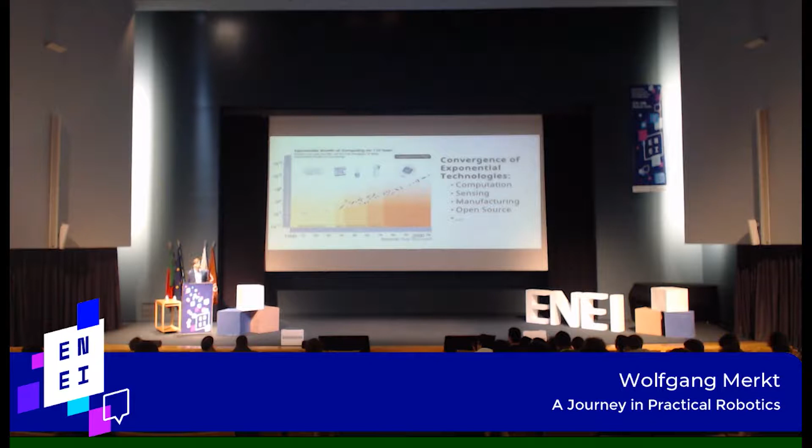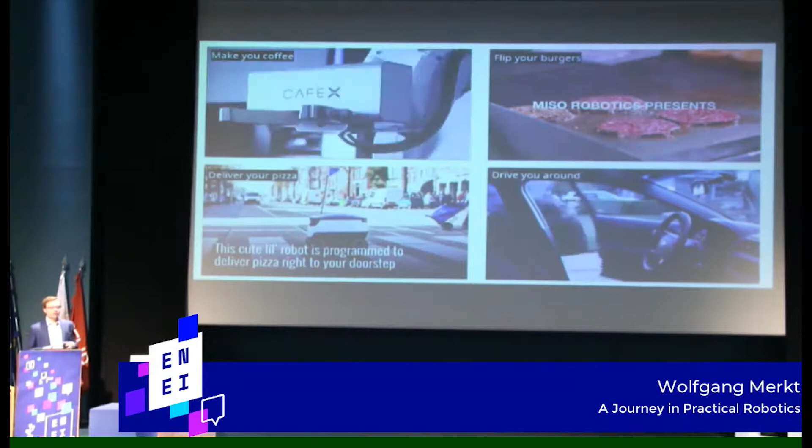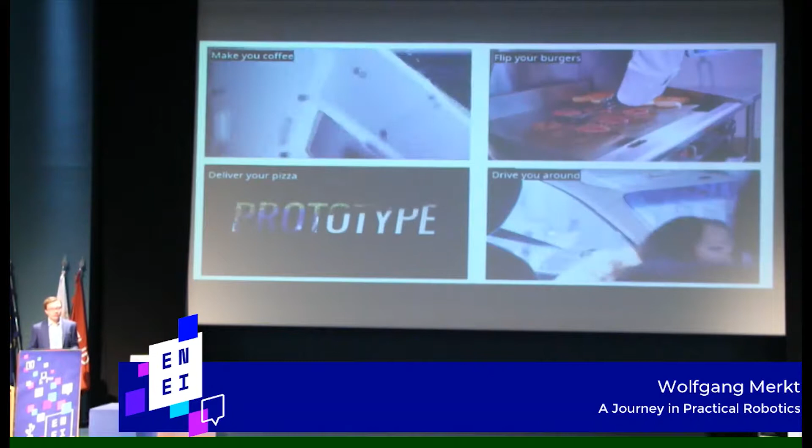What we may not know is that robotics has been an increasing part of our life for the last few years. It has been breaking into our lives in the background, fulfilling our orders with over 100,000 robots now shipping and preparing your orders at Amazon. It has been mining all the ore that goes into the Coca-Cola and Red Bull cans you may be drinking, and it's at the backbone of many advances driving the comfort of society today. But now we're at a time where robotics is breaking into daily life, touching us through media coverage and through what you may see coming over the next few years, preparing your coffee, delivering your pizza, flipping burgers, and being more present in our lives.

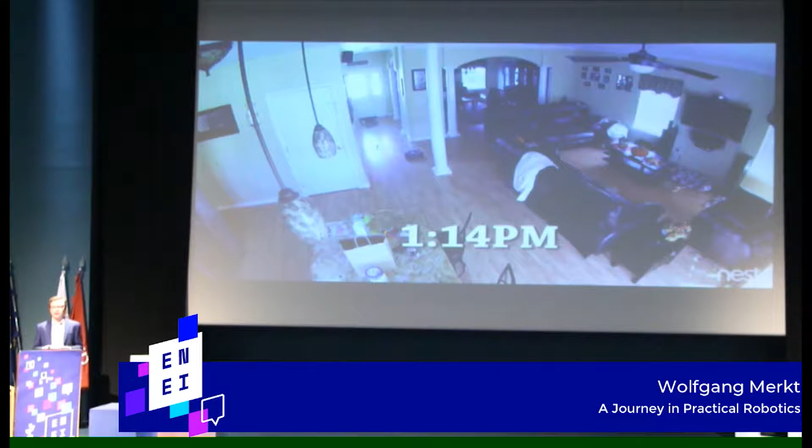However, moving robots into our daily lives and delivering consumer products is incredibly hard. Unintended stuff just happens, because you can't always encode all the knowledge, all the corner cases, everything you may want to target, even for very simple products like a robotic cleaner. Perception may still be something that can't be fully thought through at the beginning, and in this time of robots entering our lives, we may get into a period where things happen that aren't quite as intended.

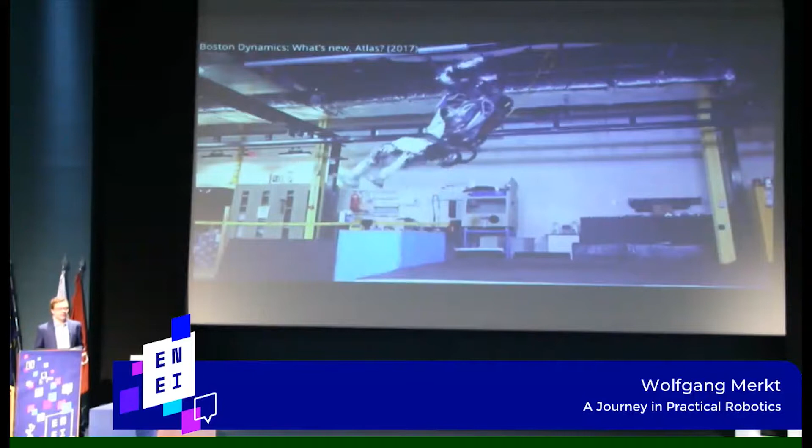On the other hand, things you may have seen in recent years show research robotics making huge strides and incredible performances that are hard to believe. This robot, you've probably seen it, is 1.5 meters tall, close to 100 kilograms, and can move as dynamically or even more dynamically than a human. But what roboticists who actually work in the field are more familiar with is something like this, where it's very common for robots to fail and fall. It may be fairly frustrating if you're working in the field, but that's more what we're used to. So the big question is: what is really the implication of practical robotics, and what's holding us back from achieving more?

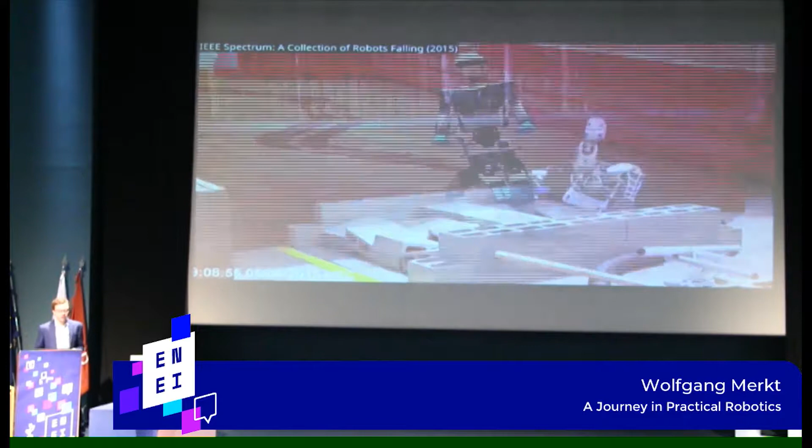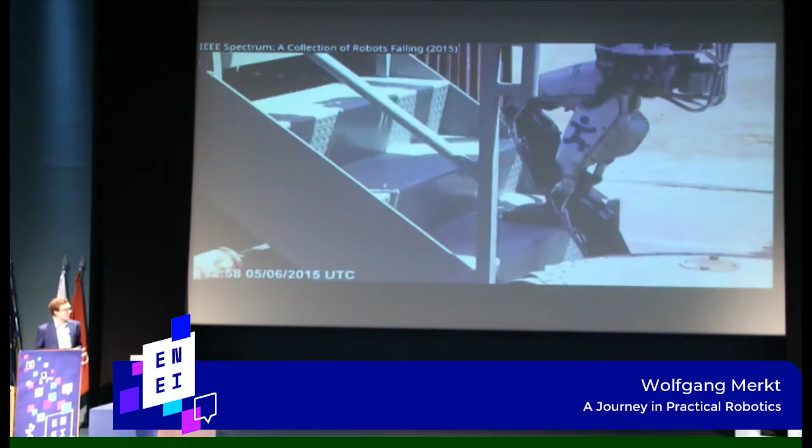To be honest, the category of these failures is pretty much twofold. Half of what you see here is because people made mistakes, and only a little bit is because the robots couldn't quite do it.

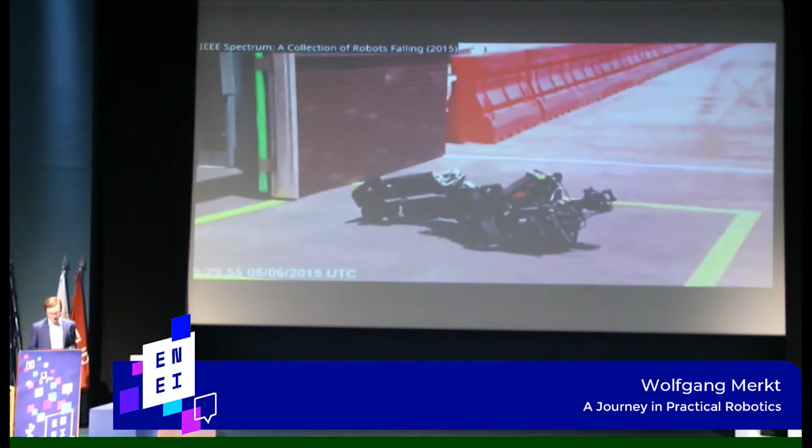All right, enough falling robots. So what I'm going to focus on today is three things. First, why is robotics actually hard, and why don't we see more robots near us or caring for us sooner? That focuses on the challenges we face and what we're doing in research. Second, why do we even want to talk about humanoids? What is so inspiring and really drives us to work on it, and what do you have to consider when you want to build robots that go into space and work there? Then, how both of these first parts fuel some of the research we've been doing. I'll show you examples and what that could mean for the future of industrial automation, especially here in Europe, as robots become more pervasive in more walks of our life.

As a little backdrop, I'm probably only slightly older than most of you here, but my journey started very early in robotics. I've been fascinated by making things move and seeing how things move. When I was 14, I decided to partner up with the largest manufacturer of industrial robots and build something like an autonomous kitchen which does the food for you.

Literally send it a text message. This was before smartphones were around, and it gives you a call back once your food is ready or once you go home.

After that, I decided to study engineering. So I'm not quite a computer scientist by trade. I did mechanical engineering and management and did a lot of startups in between, then went for different stations and internships in industrial and service robotics to do a thesis in machine learning for transferring captured motions to very different morphologies.

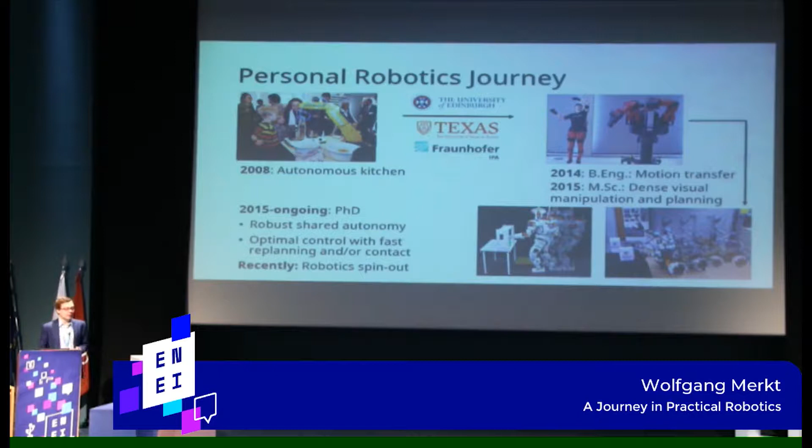From then on, I went to Silicon Valley, came back, did a master's, and currently I'm a PhD student. And since very recently, we're also working, based on what you'll be seeing today, on a startup.

The next step is really, so why is robotics really that hard to translate if you want to execute a fairly simple task in a fairly simple environment in our daily environment? And what we can achieve in simulation is very impressive.

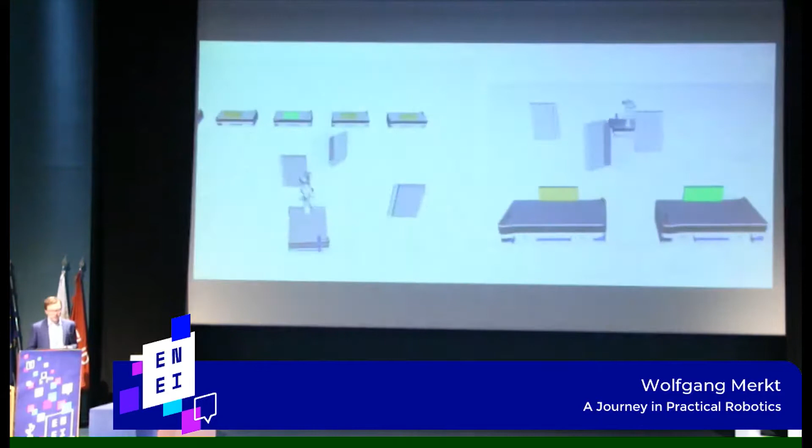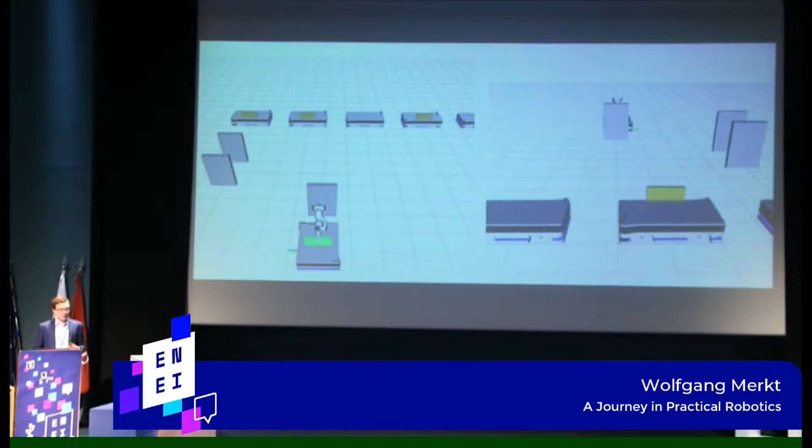So you have a lot of moving obstacles, you have robots in move, and you have to pick objects while everything in the scene is moving. And then with a lot of engineering and a lot of effort and a lot of people, you can translate that into impressive lab demonstrations that work on real sensing, that take input from the environment.

On the left top side, the scene is fairly complicated for the robot because it has very limited ability to move, and it still has to be able to maneuver through this without colliding. The challenge here is to really figure out how to do this really fast.

That is a very new way we demonstrated how you could do that in 1 millisecond, which is kind of like a 1 or 2 order of magnitude step up from what you usually do.

The second on the right-hand side was about how do you, through very remote, so you essentially sit in front of a laptop a couple buildings away, control a robot in a different environment? That's what you would do in a disaster scenario where you're very far from the robot.

And then we have a lot of work recently on a humanoid that I'm going to show you later. Similarly, we can adapt to environments, and we can work really fast.

So what you can see here on the left-hand side is a way to do tracking of objects so that the robot can figure out how it needs to change. It's not all fixed as you may have it in an industrial environment.

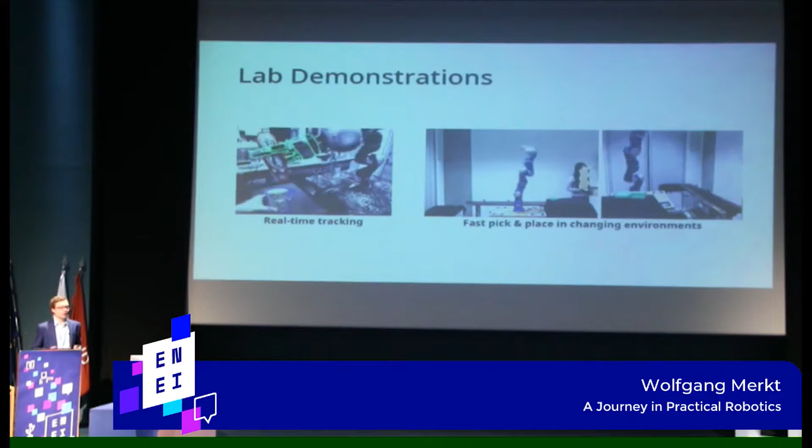On the right-hand side, things are moving again, which is very challenging in the field of robotics where we prefer things to be fairly static.

So I've just mentioned a few of the challenges, but there's actually loads if you want to move from what we see in labs to having it in the real world.

A few of the key things we'll show through this presentation are especially perception, and how you represent what you can perceive with sensors so that the algorithms you build on top can actually make sense of it. The key trade-off here is quality versus speed, and most of the sensors you can get, even when they're really expensive, are actually not that great or are just really, really slow. And that is kind of what's holding us back.

One of these examples is if you have a humanoid and you have a perfect knowledge of how things are going on in simulation and you want to run it on the robot, it may not work. That's due to a multitude of issues.

But a very visual one is you tell it to go somewhere, the thing in gold, and then it ends up somewhere entirely different, just because of how it needs to keep balance, not fall over, or how there's a lot of issues that accumulate.

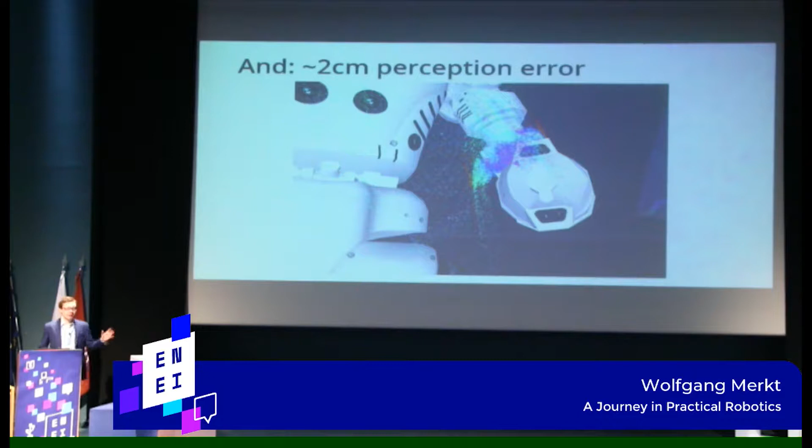The other issue is that even when the robot goes where you tell it to go, it may actually be different from where you intend it to be, because the sensing you get can have quite a large discrepancy from where it should be in the real world. So if you try to look at your hand and you're 2 centimeters off, trying to really get that bottle on the table, you may not quite get it if you're just slightly off.

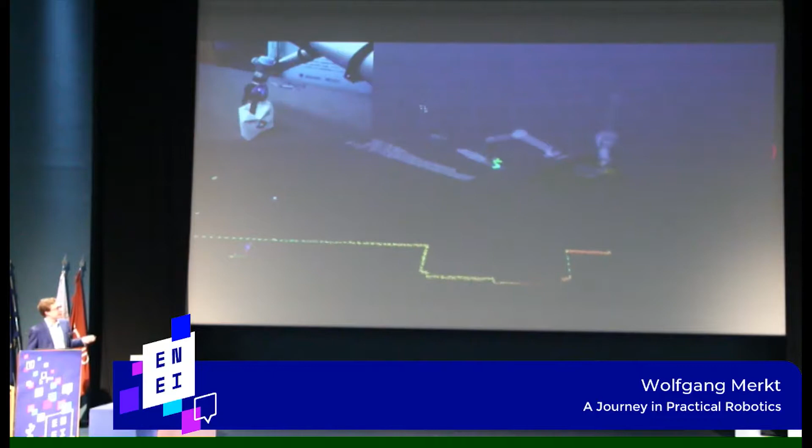What all of that translates to is this example, which is all what the operator sees - this is the user interface. You get all the sensing data streamed in, live sensing from a stereo camera, and you can see the high quality LiDAR that gives you a feeling of where you are in the building. And you're trying to pick up this box, and you just smash it, I'd say.

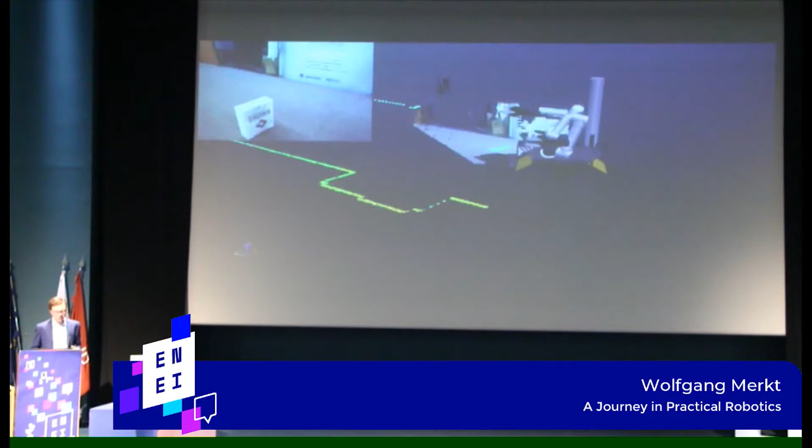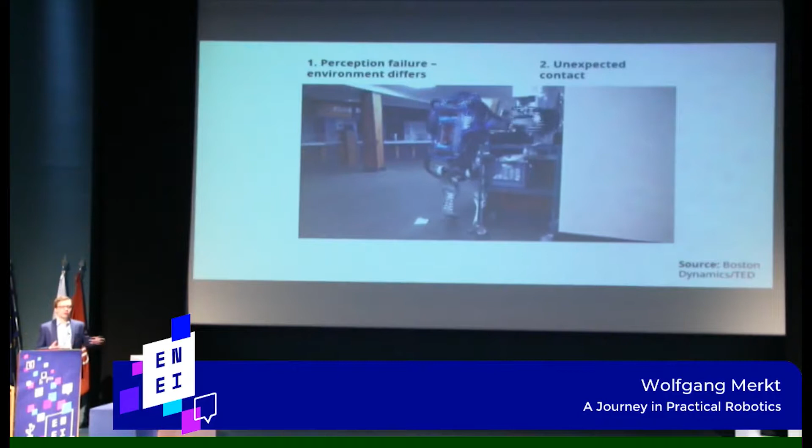And it's not just in our labs where you can see it - you can literally see it all around. If you first start with a simple perception failure, things are not quite where they seem to be. You get an unexpected contact, and yet another unexpected contact, and another, until you finally fail. The challenge for robots is that as soon as you interact and need to make contact - either walking or holding onto something - the whole dynamics of the system, the physics, change, and it's very hard for a robot to figure out what to do. So it's not quite as reliable as we may want it to be.

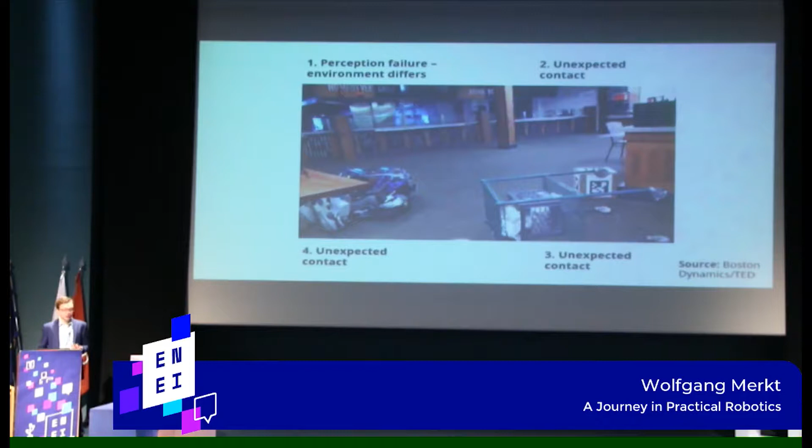If you want to go to space, this is the kind of requirement that space agencies - NASA, ESA, whoever you talk to - will put on you. You essentially need to get to reliability where you get 1 minute downtime in 500 days. You don't want your oxygen system to ever fail, but you don't want your robots to fail either. So there's a lot of certification. You can't use new and fancy algorithms, you can't pick up a library online, and you can't just use the latest computing equipment - everything has to be certified. You likely have to have CPUs that are about 10 to 15 years out of age, and every single library has to be certified, which can take a lot of time.

Let's actually have a look at how this can look. The first question when we talk about humanoids is, why would you do legs? Keeping balance is hard, it takes a lot of energy to stand, you can just use tracks or wheels or any other way to move. The easy answer is, if we want a robot that operates in the environment that we do - built for us, like buildings, streets, roads, stairs - there's a lot of things we can't do without legs. And legs are actually pretty cool: you can go over uneven terrain, through very narrow gaps, and reach really high because you're fairly tall at a very slim form factor.

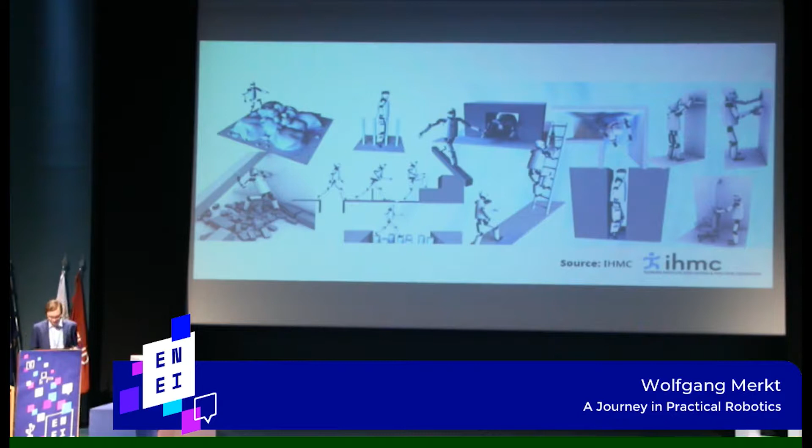So let's talk about Mars. If you want to go to Mars, it's actually quite far away, so everything you need to do years and years ahead. Everything you want to have, you need to essentially be able to ship, and that can take quite a long time. There's no way for you to get spare parts up there.

So what are the mission requirements for robots in space? The first thing is we actually want to pre-deploy essentially everything. Think about the mission where you literally just drop cargo and habitats and all the supplies you will need for the entirety of your mission on the planet - something that also prominently features in The Martian. Then, because it takes so long to get the people up, which you want to launch several years after you launch all the supporting equipment, you actually need to make sure that in this harsh environment on Mars it still is in working condition when the humans come.

And when you send them off and they're on their way up there for half a year, you don't want something on Mars to break. So when they arrive, they're kind of without oxygen - the robots really have to be there and repair all the equipment. So they need the ability to sense failure, do surveillance and mapping, and compare it against what it should be. And then also very dexterous manipulation to fix all the habitats and essential equipment that we need in space.

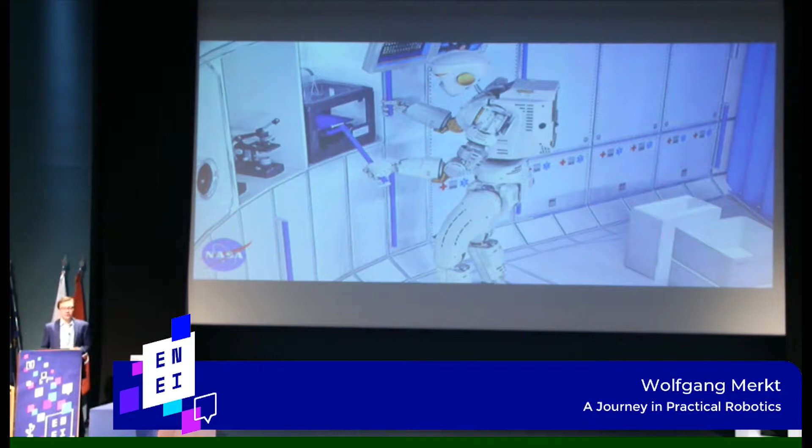So they need to be able to manufacture new components, and they need to be able to use the tools that the astronauts in that case would use.

So let's have a look at a humanoid. That's a humanoid that we work with in Edinburgh in Scotland. It's one of 3 or 4 worldwide, and the only one that is outside of the United States.

So this robot is about 1.82 meters tall. It's quite a bit taller than I am, and it weighs 140 kilograms. So that's quite a beast.

Humanoids in general have a fairly high center of mass because most of our mass is in our torso, and for the robot it's actually the battery that carries most of the mass. You may say it's bad because it's really hard to actually not fall over, but it's actually really good because the higher your center of mass is, the easier it is for you to actually keep balance, kind of like taking a pen or a broom and balancing it on your finger.

Robots that are not bolted to the ground are harder to control and harder to compute motion for, just because they move around in space, and you need to take care of all the dynamics so they don't just topple over. And then you have a lot of motors for which you need to plan. So it becomes a very complicated problem, and you need a lot of computing power to figure out what to do at any given time, and you need to do that at about 500 to 1,000 times a second.

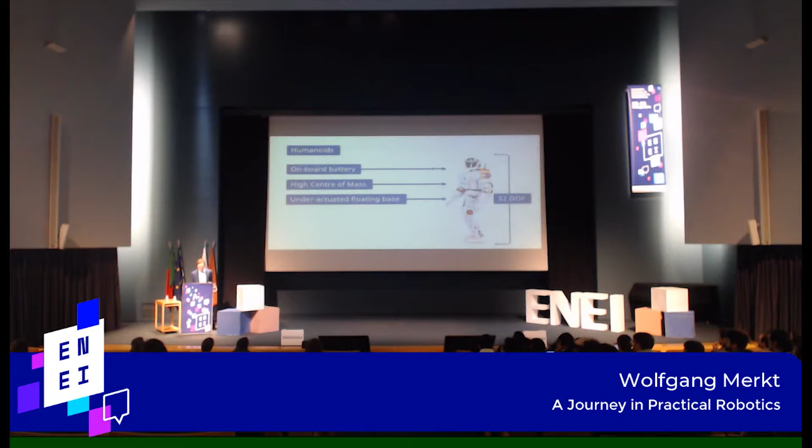So what's the sensing that you get on those robots? There's kind of like 2 natures of visual sensing, live sensing data. The first is a laser. A laser is very slow but very high fidelity, so you get a really good field of view of what is going on. And with that high quality sensing, you can get a very accurate percept of the world with simple algorithms and open source libraries.

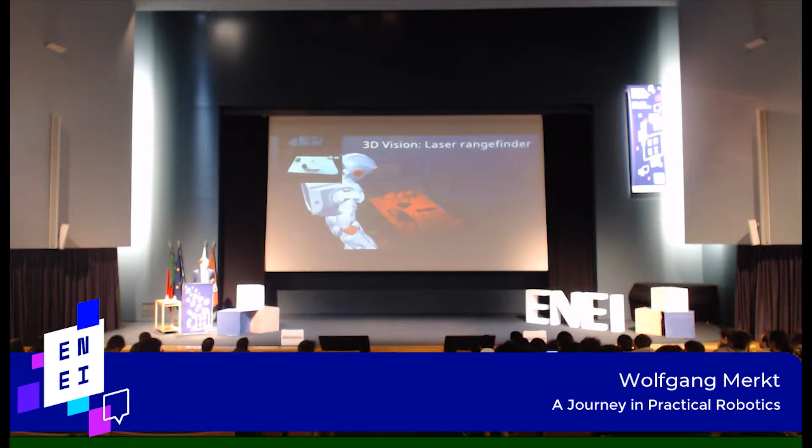What is a table? What is an object? You can almost just from these point data see what is actually going on. But it's very slow. It can take up to 30 seconds for you to get one of these images, so you can't just use it for reacting to changes in your environment.

The second, and faster sensor, is a stereo camera pair, and it gives you dense stereo, but as you can see, it's actually fairly hard to see what's going on, what the table is, if you don't have enough information, and it's very, very noisy. So most of your algorithms need a high level of robustness to deal with this.

All of these challenges essentially mean that if you want to control a single one of these robots, you need a large team behind computers. For one robot, you may have 5, 6, 7 people monitoring every single change, approving every single thing that goes into it. And that may not be feasible if we're going to Mars.

The reason for that is we're having a large communication delay from you pushing the button for it to execute something to you seeing the result, that can be 20 minutes, and you only get a very short window. So if we want to go to Mars, we need a new way of operating our robots.

And that's very, very similar to what we want to see in the future of industrial automation. So if you look at a traditional factory where you may have encountered robots, we're looking at fast and very precise motion in an environment that we fully control. So what does that mean?

The first thing we want to ensure is that we have repeatability. The task that the robot carries out now is the same that it will carry out in a few seconds, in a few minutes, in a few hours.

The second is all of our robots are really rigidly attached to the ground, so you really know what's going on. There's not much variance. There's no dynamic effects from the environment, and we're protected and shielded from the human, from the people. So there's no risk, and you don't have to take that into account.

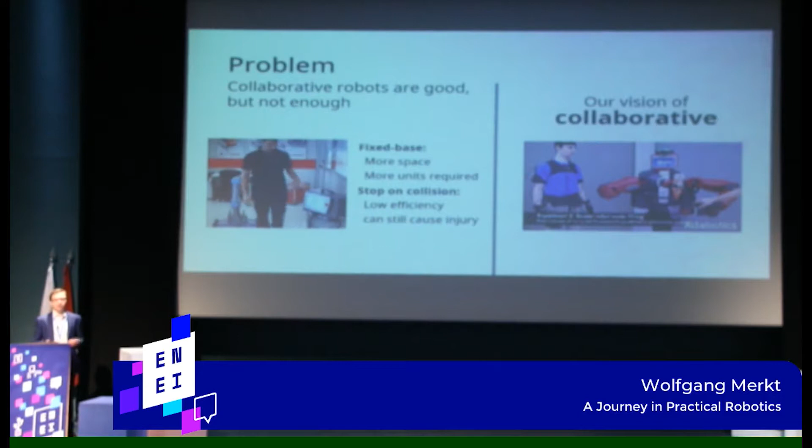So the motion that we're working towards is more collaborative, where the robot senses what's going on, what you're doing, and what you may want to do, and adapts around it without having to stop. It's a more efficient way of doing things. And the system that we propose to do that is a shared autonomy system.

The robot operates autonomously as long as it can. When it senses that it can't, it stops and tells the operator what is going on and asks for input. Or the operator, on the other hand, can take input at any given time and say stop, I'll take over, I'll do a bit, and then it goes back to full autonomy. So it allows a higher bit of efficiency just by allowing the best of both worlds to be joined.

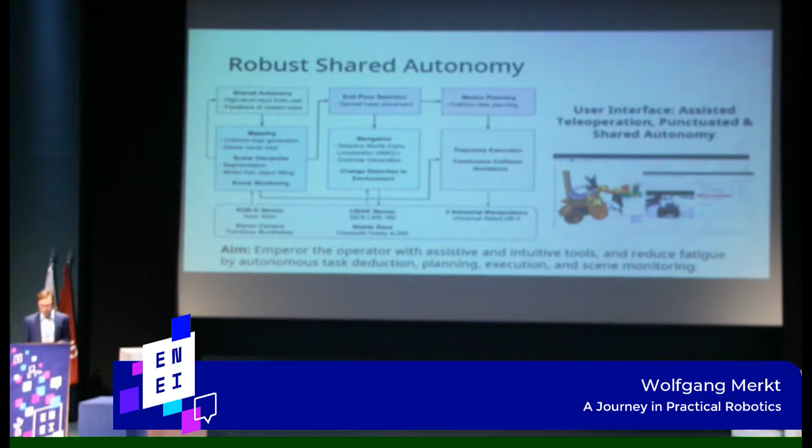At the heart of this is how we represent the environment for all the other algorithms—for figuring out how we do motion, for figuring out control, for figuring out whether someone is moving into the field of the robot. So what we're doing here is we're actually using two things.

The first is, on the left-hand side, a really dense fusion of sensing. It's high fidelity, it goes up to like 1 millimeter, 2 millimeters accuracy. It takes a little bit of time to compute, and that's very similar to what you get in virtual reality, so we're working very closely with people in that area.

From that, you can then figure out the semantic information—where objects are, how they roughly look, and how you would be able to interact with them, how you could grasp them, how you could pick them up. The second representation looks a little bit more like Minecraft on the right-hand side.

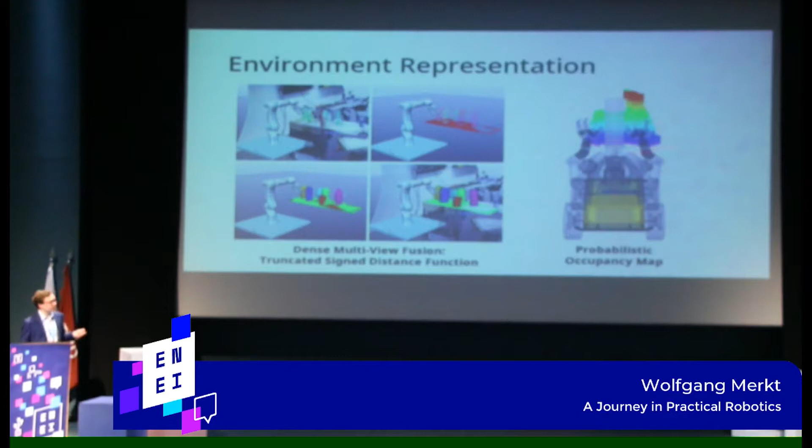That's a way of representing the environment fairly quickly, and it's something where the robot can, like 10, 20, 30 times a second, figure out whether it needs to change, whether something is changing.

The whole process is kind of illustrated here. You get several very dense sensors—in this case a Kinect—and that's a lot of data to process, so you need 2 to 3 computers to process that much data at once.

Then you can run several stages of getting rid of noise and artifacts, and at the very end you can generate one of these beautiful Minecraft-like maps that all the algorithms can work with fairly well.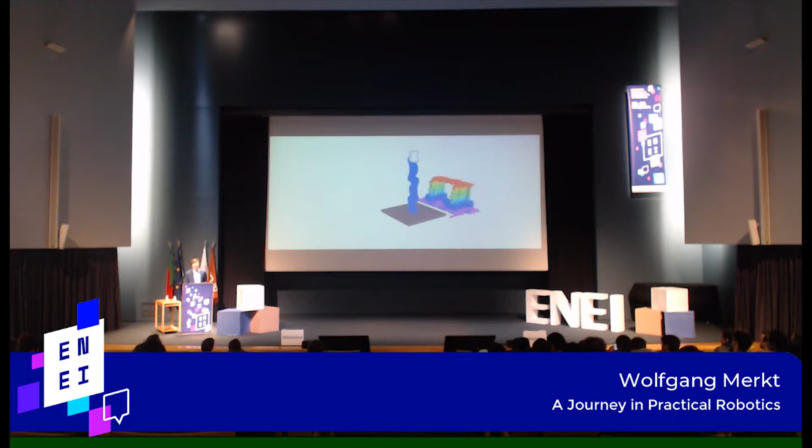But figuring out what the environment looks like and what you do with it is only the first step. The next step is how do you conserve energy and figure out where you essentially need to go to be able to work in this environment, because you can't just simply figure out there's an object and drive up—you may not be able to use your robot in a certain way depending on how you position yourself. So that's a lot of work that we've looked at.

Where is a robot actually really good at operating in the workspace? That's essentially where it's green. And where does a robot essentially have no ability to pick up things or even reach because of mechanical limits? What you get by doing so is the ability to react to change.

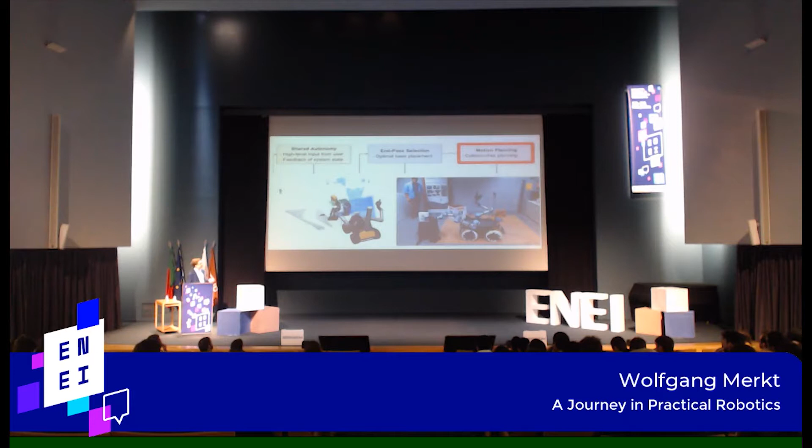What's usually not possible in robotics is, once you press start, to react to changes. In this case, we could react to the object that was moved by the operator, and also when the target gets moved, you can adapt to it and be more interactive with what the people do without requiring to stop.

The second thing is, if you want to move away from cages, is how do you make sure that you're still safe when somebody does things they're not meant to do? In this case, with this Minecraft-like environment representation, we can detect when someone is moving into where the robot wants to move, stop the robot safely, and then immediately resume once it's clear. All of that can look like this.

So in this case, again, you see on the right-hand side what the operator sees, and that's essentially what you will get when you're entirely separated in a different room in a different city.

On the left-hand side, you can see what the robot does. With the system, we can have things run automatically, like picking up a bottle. We can have things run semi-automatically, where a person says there's a box in my way, and the robot figures out how to push it away. And then you can do full control, like with a remote control, where you can literally drive it around with a joystick and execute and figure things out.

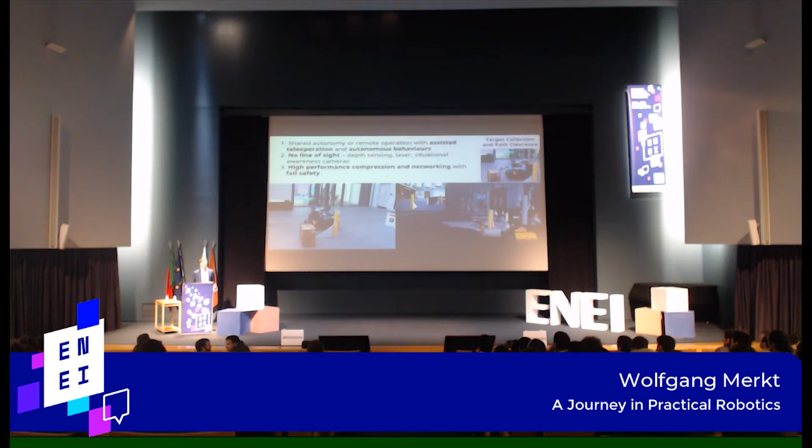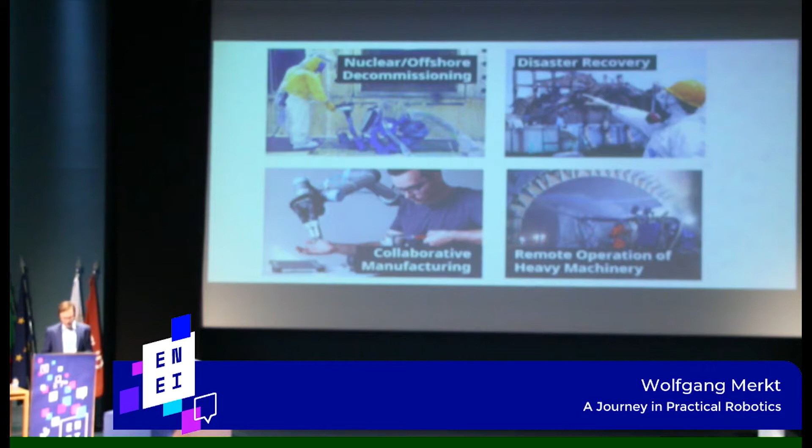But where is this useful? It's useful in a lot of areas where you don't want people to go, because they would be in harm's way. So if we're talking about nuclear decommissioning or operating heavy machinery underground, it's fairly dangerous for people to be there, and we'd like to get them more in front of a computer to do remote control rather than having them be in harm's way.

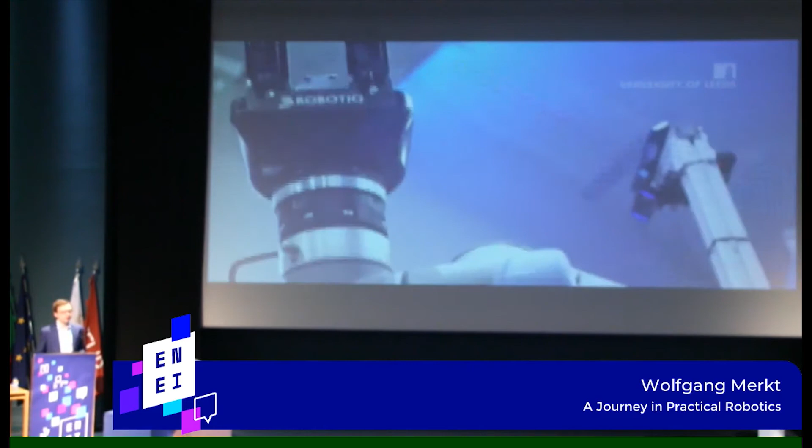And that's kind of like a summary. So we took this system to an international competition. Our robot is a mobile manipulator for extreme environments. We're trying to have a shared autonomy system that is very robust to changes and is able to go into dangerous environments and use the human operator as the high-level person who gives the instructions, with the system itself being able to complete missions semi or fully autonomously.

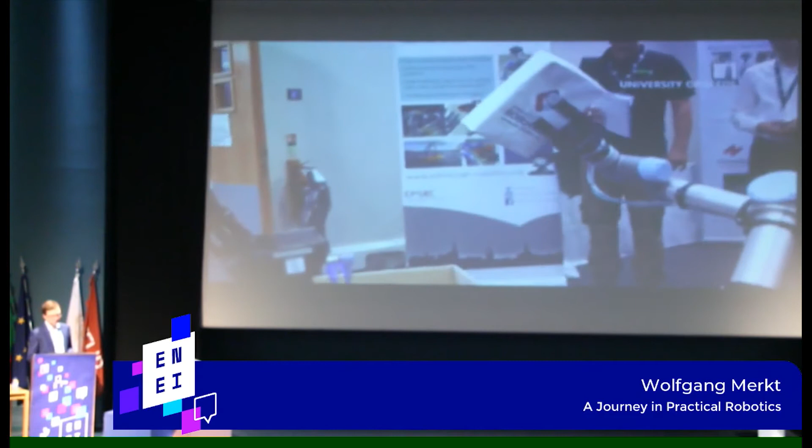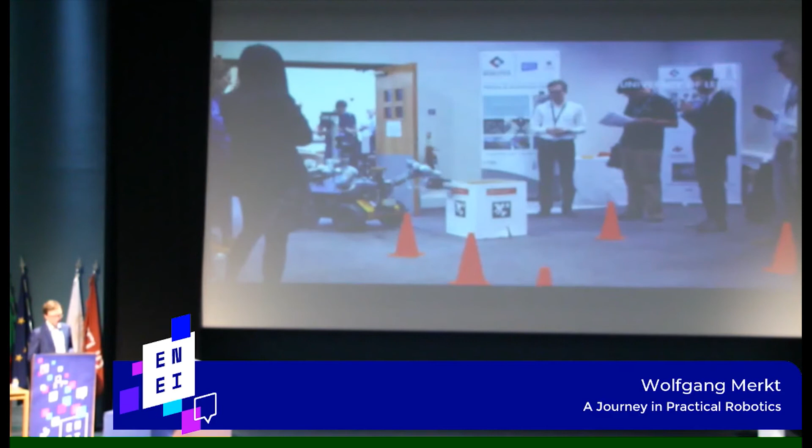So when trying to develop a platform that goes into the real world, we don't have all the luxury we have in a robotics lab, such as knowing exactly where the robot is, how it's moving, how fast, to which position, when it's exactly turning, which makes controlling and especially identifying objects of interest, the whole perception pipeline, really hard. What is something that we want to manipulate? What is an obstacle that we're trying to avoid? And what is something in the environment that can act as a tool, like a lever to open a door?

But we're still trying to do that autonomously and build our perception systems without taking prior knowledge into account. I think the importance of these events is not only being able to test in the field and network with other researchers, especially companies and stakeholders such as governments that work in this area. There is a lot of opportunity to integrate solutions together and basically eliminate a weakness that one system might have with the strength of another system.

So I'm actually fairly excited about what we saw here, because when I started in robotics about 10 years ago, that would not have been possible to do easily. And I think that's some of the key takeaways, because now we're at this age where the robots are really coming, but they're not what you may get in media. They're not going to take all the jobs. They're not going to come after us. You've seen a lot of failures here.

The second point is, we're now having an open source community that is very vibrant, so you can actually pick up things online and there's a lot of help, and that's something that just started about 5 years ago, so I think that's why it's really interesting to see how the next 5 years pan out. And then finally, as we saw in the beginning, we're finally at this age where you can make things truly move. That's actually fairly exciting, and when something works, it really gives you joy.

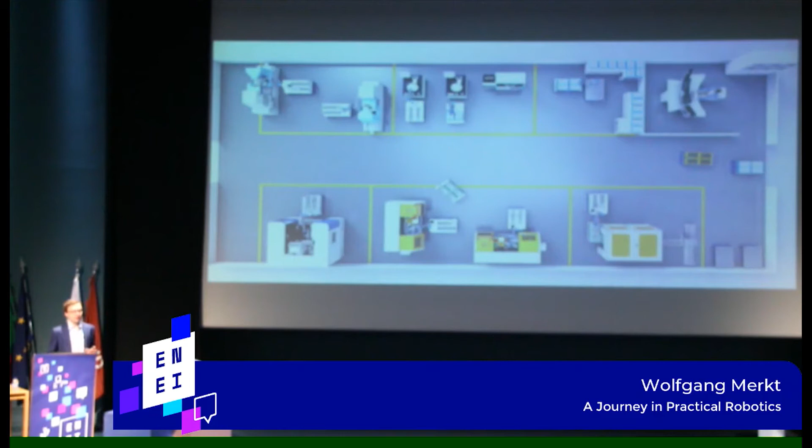And then finally, I've shown you some of the research progress that we've been doing over the past few years, and that's actually something we're continuing. A lot of that we think helps industry and helps us bring jobs back to Europe. So we're working on commercializing the system as of recently, and that's kind of our vision.

So the idea is you have a traditional factory, but you put a lot of robots in, and without having to change the environment, you can have a single operator control the entire environment with the robots we've been seeing. We also think that's a good way to get a lot of the exciting research that we've been seeing in labs out into the real field.